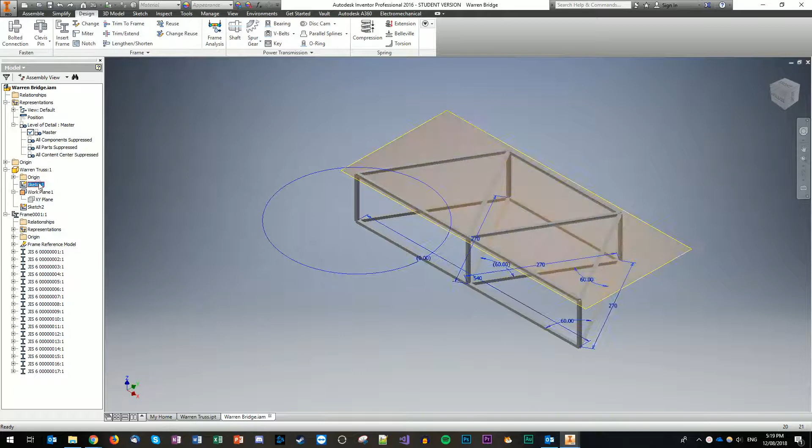Okay, so let's begin. Before we start, there's a lot of extra stuff here that's not quite useful. It's looking a little bit busy. So if you bring up the truss that was originally made up, and if you don't want to see all the other measurements and all the other stuff that comes with this, we go down here to visibility and click on that, and we'll get rid of that work plane as well, just so that we can actually see the full trusses that we're dealing with in the bridge.

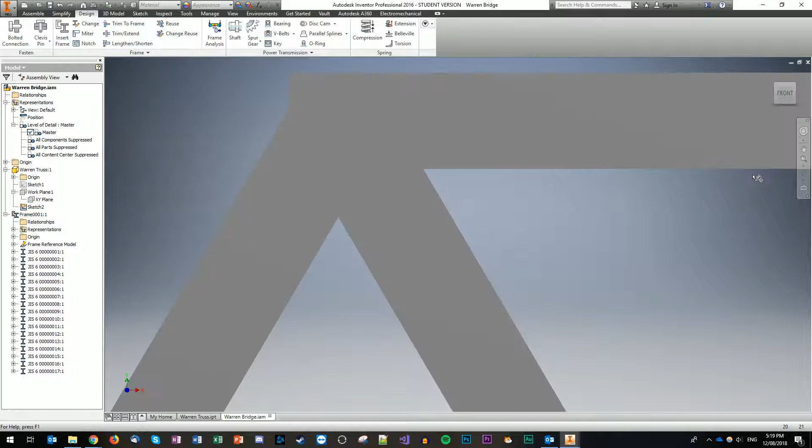Okay, so let's begin. If we use the front and we zoom in at the top here, if we look at this corner here, you can see that's not quite perfect. Basically this member is coming up to a certain point. You've got the top here. There's all this busyness going on where it's not quite exactly lining up to where it needs to be. So what we're going to do is go through how to actually make that work.

So there's a couple of different ways. This is just one way. And we want to basically make it so that the balsa is perfectly easy to cut, and we can make up a little IKEA manual of all the stuff that needs to come together.

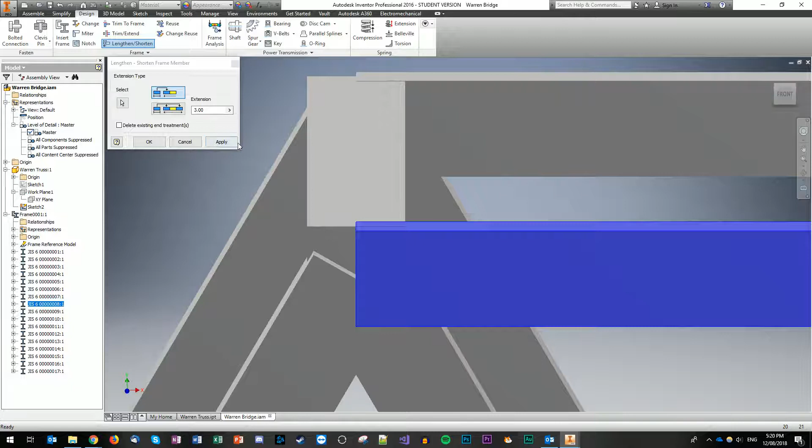So the first thing that I'm noticing here is this beam that's connecting to the two trusses doesn't quite line up here. So we're going to lengthen this one here by 3 millimeters. We click on this and we go apply, and because we've clicked on this side, yep, there we go. That's actually extended it so that this is perfectly lined up. The reason we've done that is so that the center point allows the transference of the force going perfectly through that.

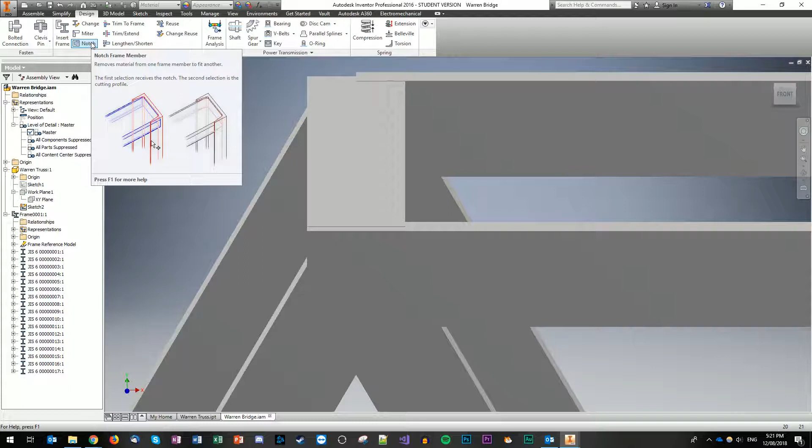Then the next part is we want to connect this beam to here a bit better. I'll just highlight these so we can see them. Miter basically makes the frame connect like so. You've got two beams, it will automatically extend both sides and connect them. Notch is used where you've got to put a beam inside of another beam. It allows it to remove the material where it's overlapping.

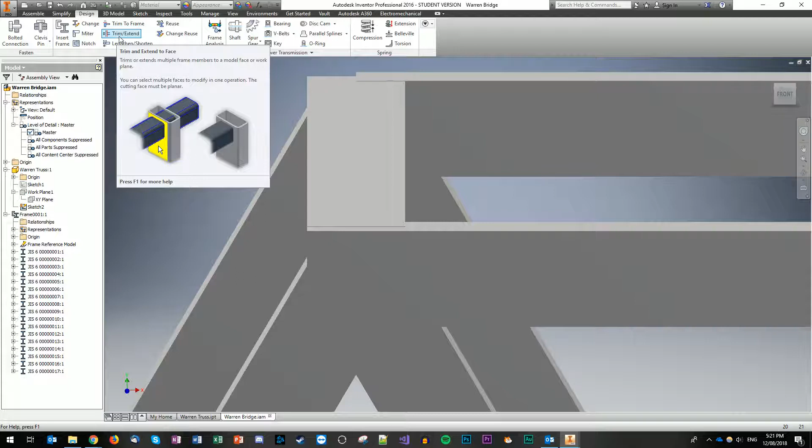Trim to frame: if your beam's overextended, it will just basically cut off the useless part, so all that blue section. Trim and extend basically extends to the different faces, so that's quite useful as well. Lengthen and shorten is what we just used there, where we've extended the beams. With this one, I'm feeling that probably a notch would be useful.

With notch, we've got a blue member which we click on first, and then the yellow to signify the part that it's going into. So we want this beam coming up to be notched into this, and we'll go apply. Awesome, so now we've got this beam straight here, and this beam needs to be cut like this to be able to join that. Now we've got a good little joint here for that to sit into, which we can obviously measure out when we're cutting up our balsa.

So it was done pretty well. This beam obviously is overlapping here now as well. So if we click on this and this beam, and go apply, that's now fixed that. And then there's also this overlap here. So let's click on the beam again and this one and go apply. So now we've got this little perfectly cut here.

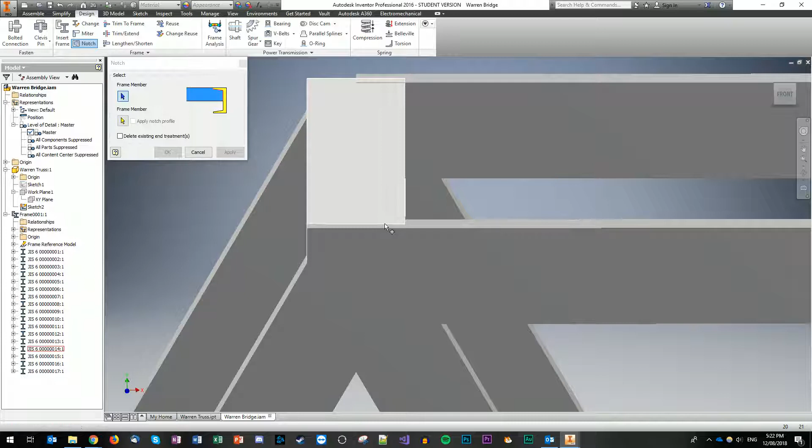And just to check the other side of the joint, see how there's this overlap here. I probably want to trim to frame. Yes, let's try that. So let's go trim to frame, and we'll click on this one to this one, and then apply. Let's see what happens.

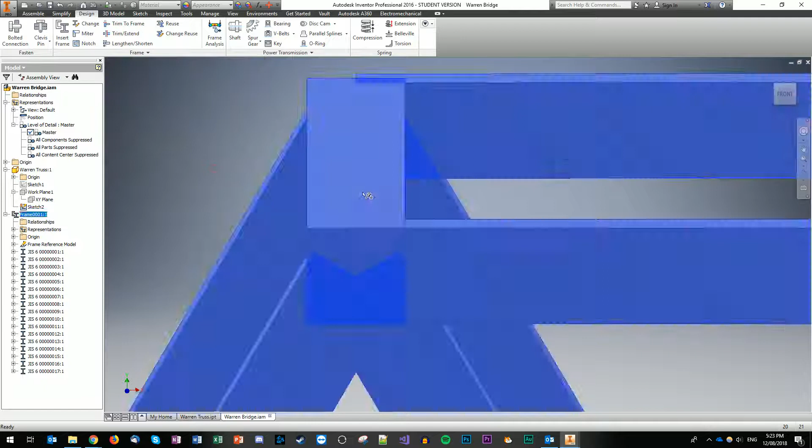Let's undo that. This is where it gets a little bit harder. Let's zoom this camera around and see the trouble side, it's basically coming into that face.

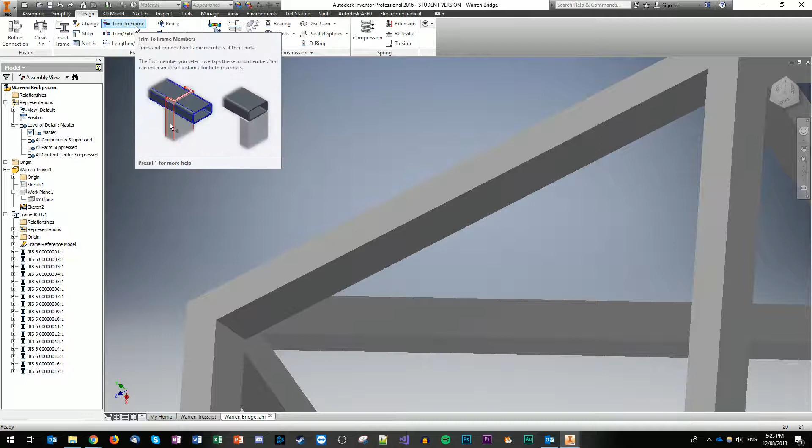Let's have a look and see if there's a trim to frame option, I think I saw that somewhere. Let's see what happens when we miter this. That's one way we could do it, but I don't like that joint. Let's cancel that, undo, and go trim to frame again.

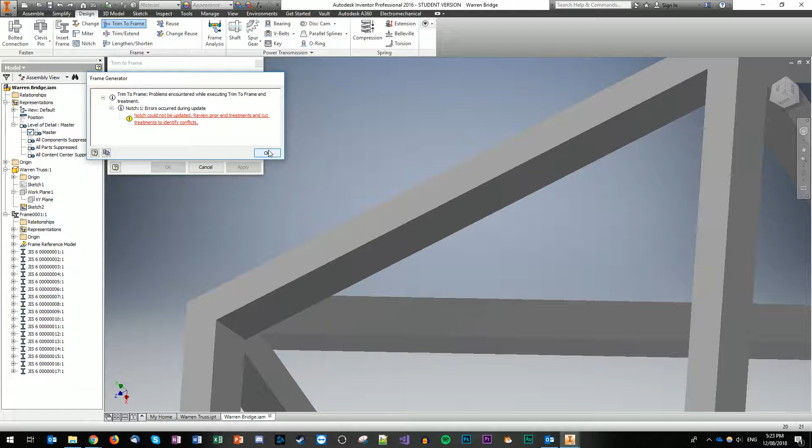And if we click on there... oh, because of that other side. Yep, I see what's happening. Let's go back and zoom in on there.

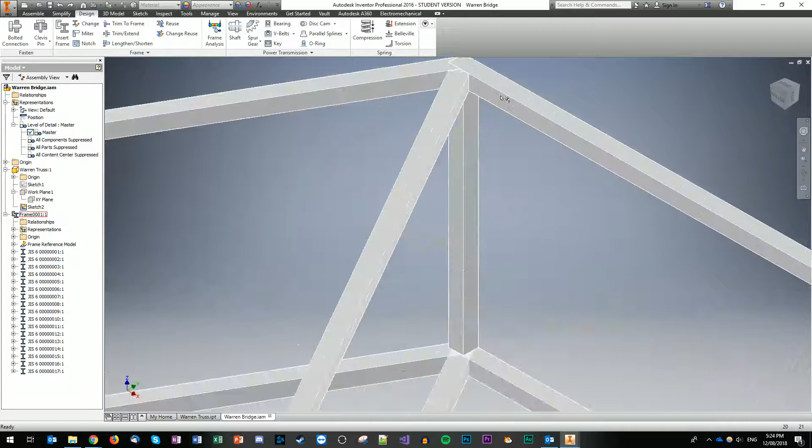Let's see what happens if we notch this, so we go that one into that one. Ah, perfect, awesome. So we've got that whole beam at the top and then that one there. So we'll do that now as well with this side while we're here.

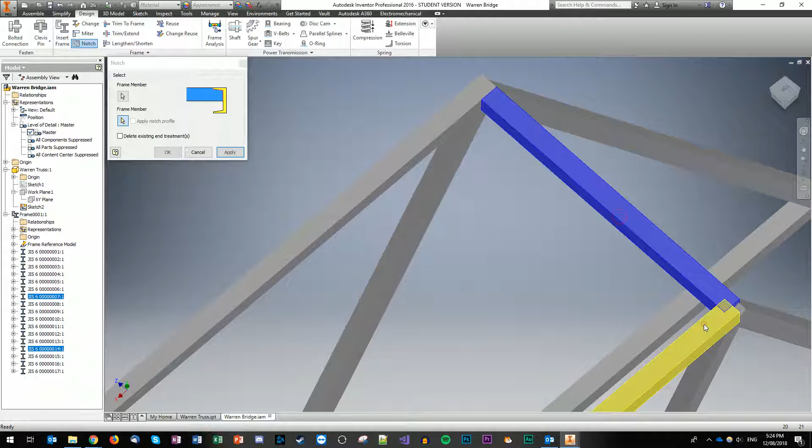Oh no, we can't because we haven't extended that side yet. Let's just keep going with that side. Cool, so that corner is effectively done. So let's go down here and let's fix this guy up.

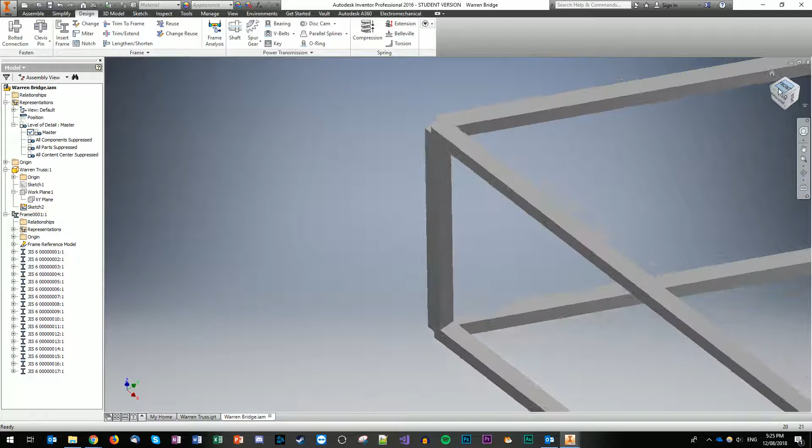So the first thing that needs to happen in the grand scheme of things is we need to extend this that way. Okay, so we need to lengthen, and we're going to go 3 again, go apply.

That's made that, and then we're going to notch it. So we're going to notch this one into there, and then go apply. So that should have made that cut.

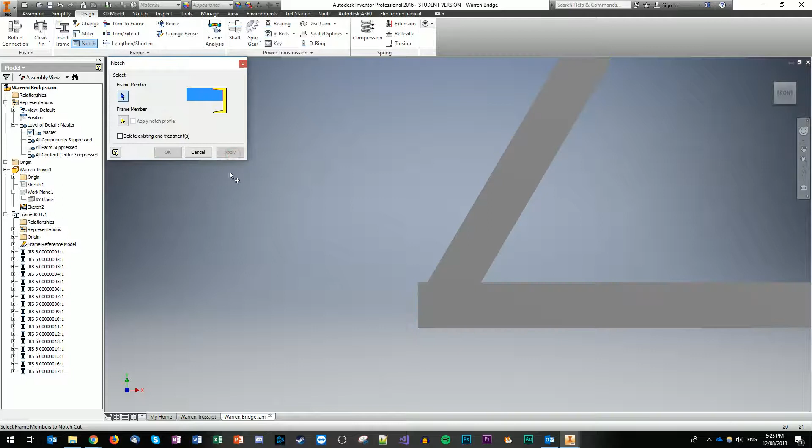And then while we're down here, let's notch this guy into here. So if we notch this to that, perfect, so now we've got that all sort of lined up. That's pretty cool. So now we've got that side done.

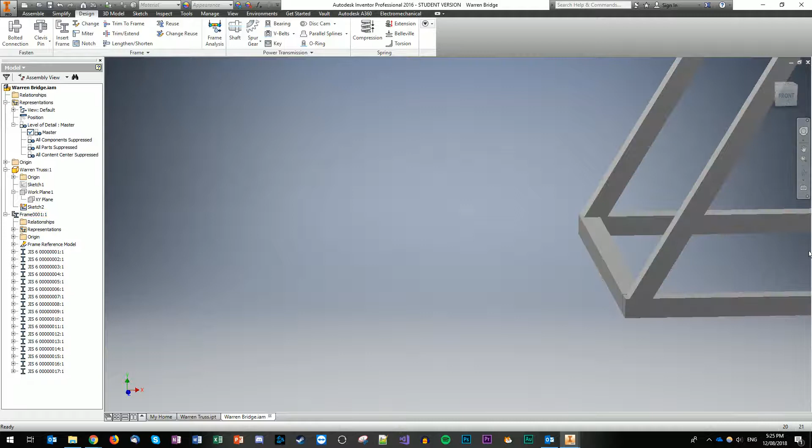We'll scroll across to the center here, we're going to do the notching again. So if we look at the frames, we've got this one coming down into there, and there's this huge sort of overlap happening here.

So we'll go notch again, and we'll notch this one into here and apply. This one into here, then apply. And then there's this sort of overlap triangle in the middle here.

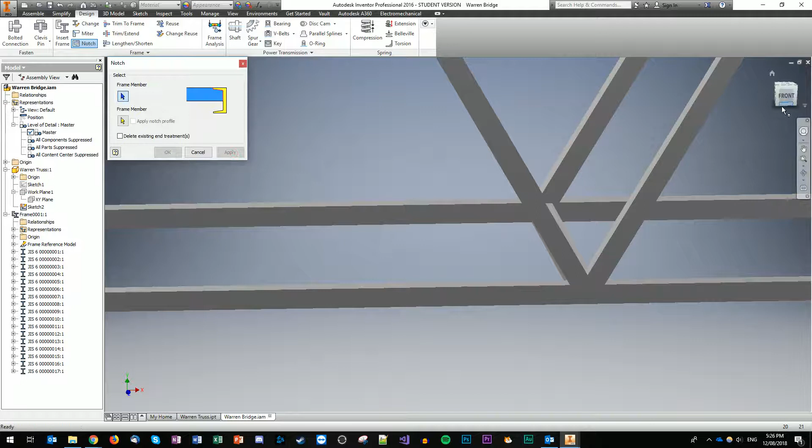So we're going to need to make a decision on which one to cut. So I'm going to cut this one into this one, and then apply. And then while we're here, we'll notch our beam into this, then apply.

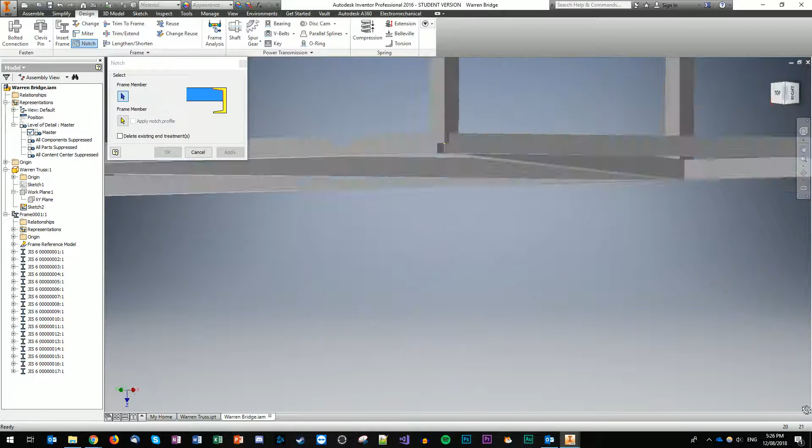So hopefully that side is done, now we move up here. Whoop, too far, there we go. Perfect, awesome. So we've done basically the 3 different cuts that will need to happen, so just to show you that it's possible again, we'll start at the top again on this side.

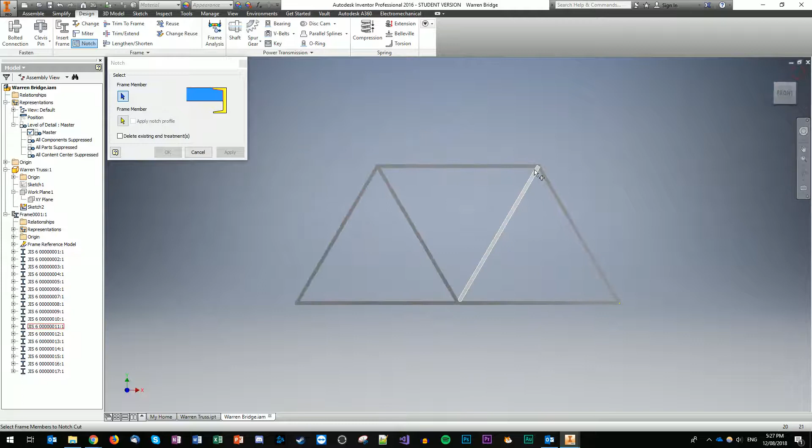Well, let's go front and we'll rotate around. So we'll go from here and we'll notch this in here. So sorry, we need to lengthen it first. So we'll lengthen this side by 3.

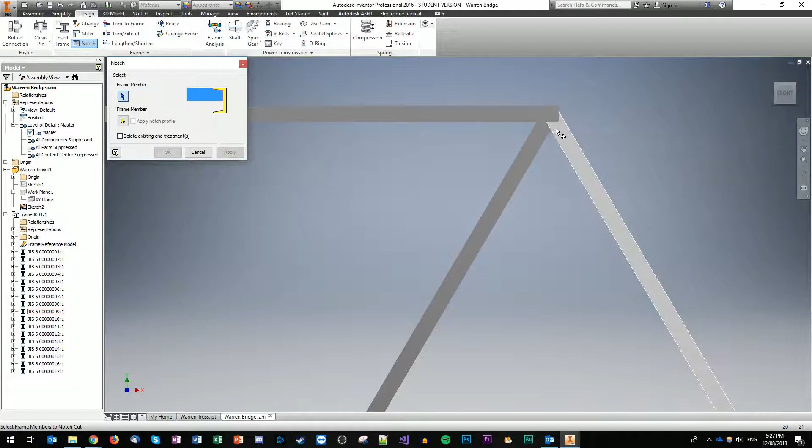Great, and now we'll notch this one into this one, then apply, and then this one into this one, apply, and then this one into this one, then apply. So that should be all done there.

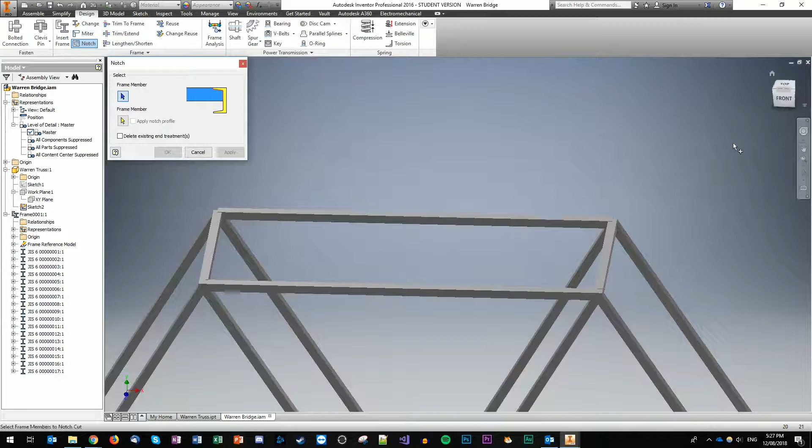Oh, and then we need to do the back plate as well. So we're going to notch this into here, and then go apply. And then we're going to go down the bottom and do it all over again. Here we go.

So first things we need to extend or lengthen this one by 3, which hopefully it's done, great. And now we need to notch this one into here and apply, and then notch again this bottom beam onto this one, apply. Fantastic, so you should have all these different beams and members all matching the different measurements.

And now we can just basically go off and do a working drawing of all this. Now I'm not going to do the other side because it's exactly the same process as this side that I've done, but in the next video I'll go and do that right now, so you guys have it all nice and symmetrical. And then the next drawing video I'll show you how to do all the working drawings for this. Fantastic, thank you very much for watching, and see you shortly.